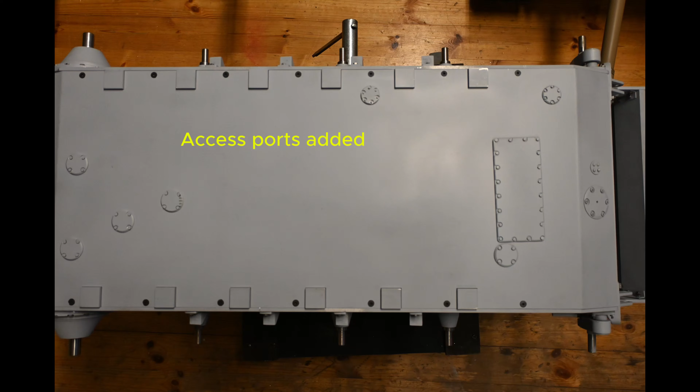In this video, I'll be looking at the underside of the hull, fitting some of the covers. These covers don't come with the kit, but they'll add a little bit of unseen detail. Next, I'll show you how I detailed the bracket connecting the upper to the lower hull, and then how I fit the components for the upper hull.

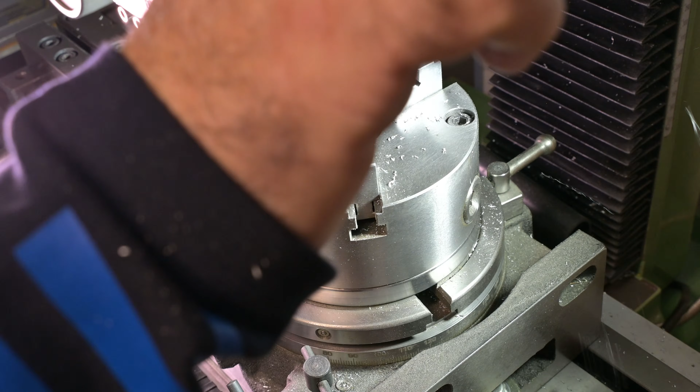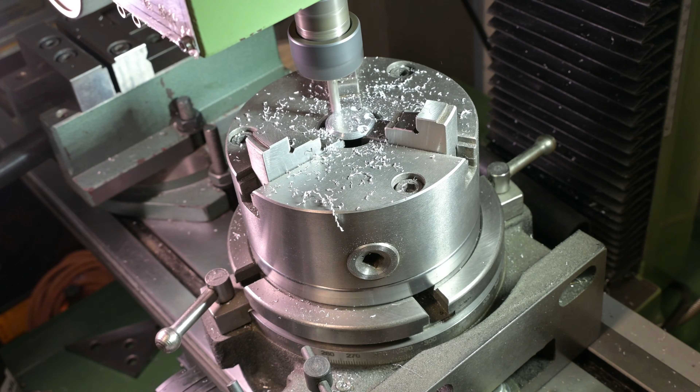I'm moving around in 120-degree increments. This is a bigger cover, and at this time it's 4 screw holes, so I'll be using 90-degree increments. It's also a slightly bigger tool.

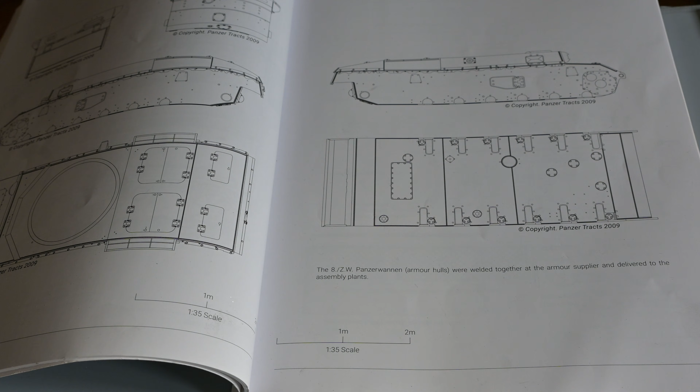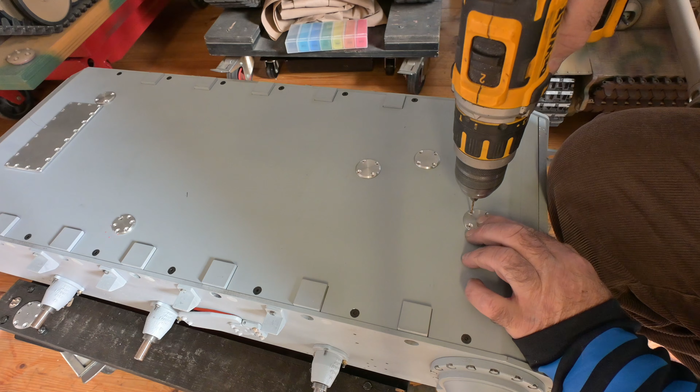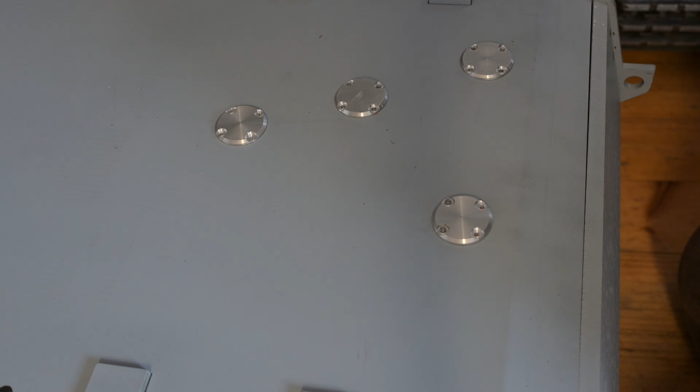Using the drawings in Panzer Tracts, I've worked out the locations for the various hatches. Here you can see I've placed them, and I've marked the locations for the drill spots. I'll drill out each of the hatch holes in a similar way.

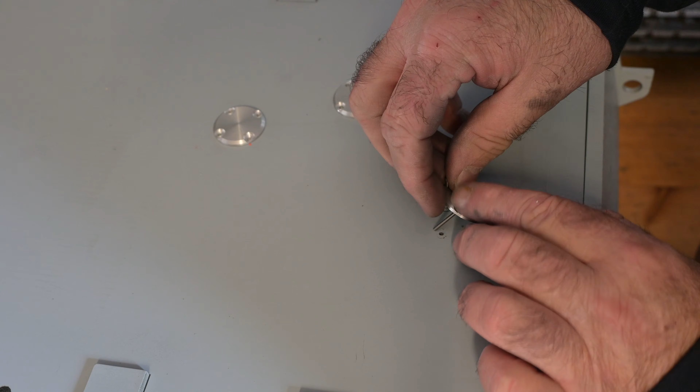Here we have the covers fitted. These are 10 BA screws and these are 9 BA screws fitting the hatches.

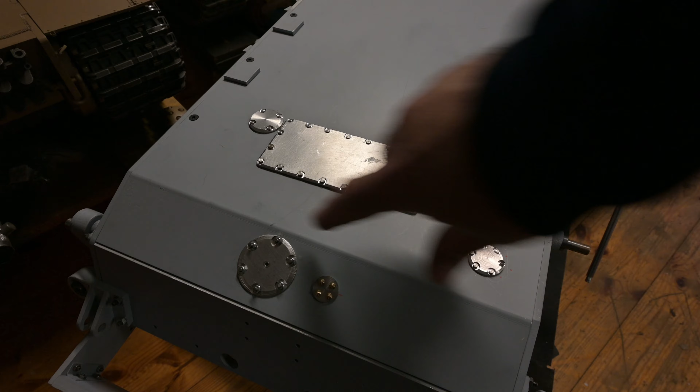I've also fitted these hatches to the rear. These will be more visible. The small access hatch that you can see here, I've added cone heads to this. They're dummy cone heads.

So now we have the access hatches etch primed. Once the tank is built, these probably won't be seen much. So why do I bother adding them? Well, I'm not a professional machinist, so it's good practice just to make these hatches. I may have to make something similar for a more visible place in the future, so it's good practice to make these hatches now. Also, it's nice to know that that detail is there.

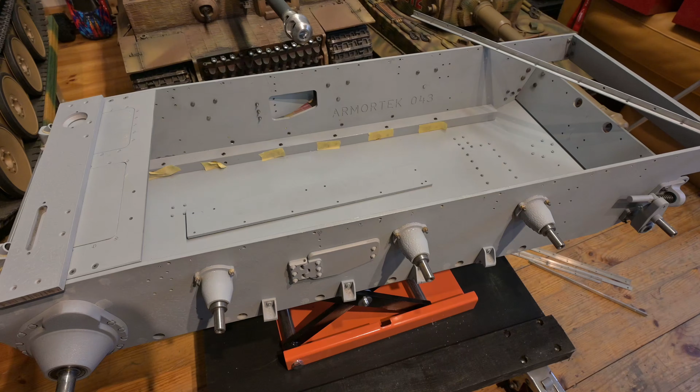Next would be to start the upper sides of the hull. The kit came with these aluminium angle brackets and they fit roughly in this position, and the upper hull was built on top of those.

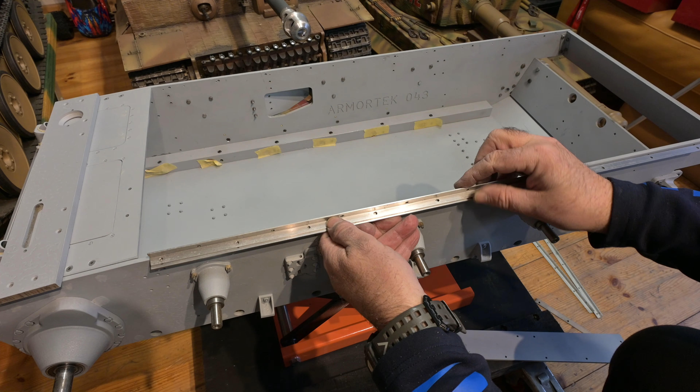And this is how the upper hull is attached to the lower hull. It's quite similar to the real Panzer III. The full top part of the hull could be removed for work on the transmission and engine by undoing the brackets and simply lifting away.

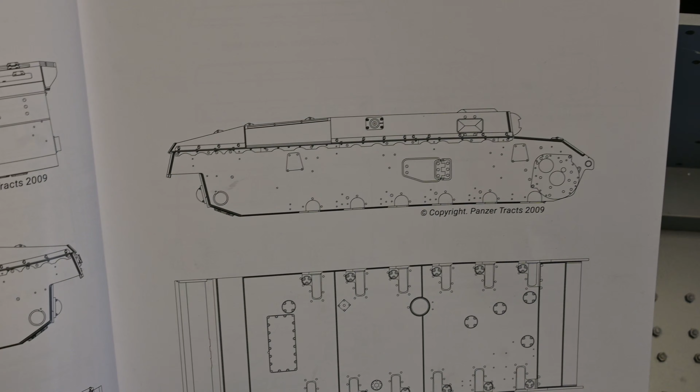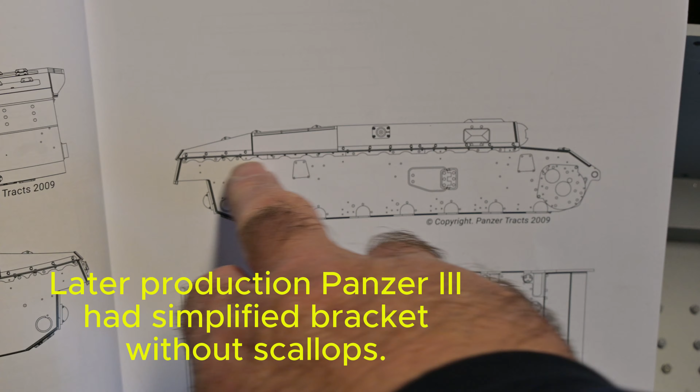Looking at my drawings in Panzer Tracts, the bracket should actually be a bit longer than the kit bracket. Also, some of these models also had this scalloped finish on the bracket attaching to the hull. The kit is just a plain angle bracket.

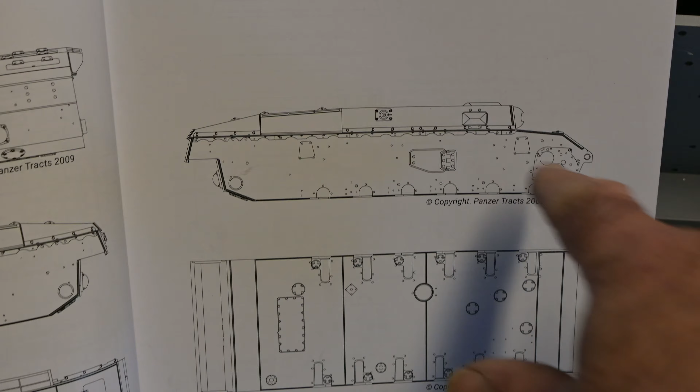So I'm going to use new brackets and I'm going to replicate the scalloped finish. Here's one of the new brackets I've made. They're a little bit longer than the kit part.

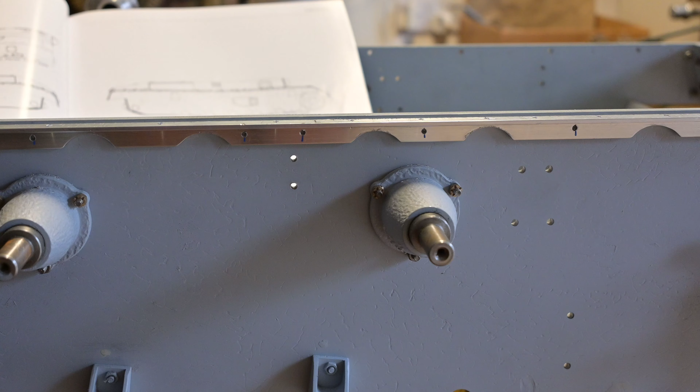Here's the new brackets I've made. They'll fit to the hull using M2 screws. I've tapped the new holes with M2.

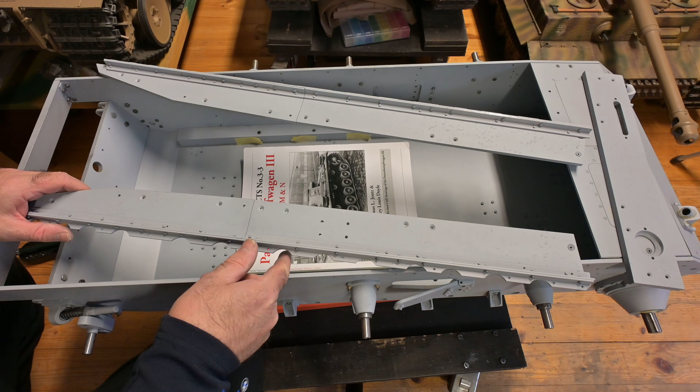Here we have the hull sides assembled with my new brackets. They'll fit on here. I can bolt them on using M2 screws. I've also fitted the brackets to attach the front glacis plate, as my bracket covers the screw position.

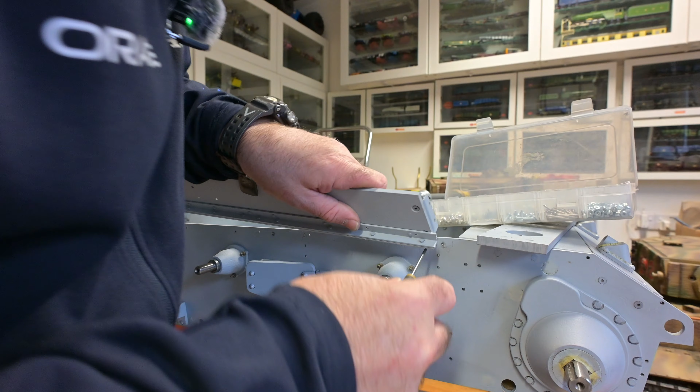So let's get these in place. I'm not going to secure every hole at the moment. I want to keep it fairly loose for the moment.

So that's that hull side secure. It's only held with 3 bolts at the moment, whereas I've actually tapped 13 screw holes to hold it on. That's both sides fitted securely, just 3 or 4 screws holding each side.

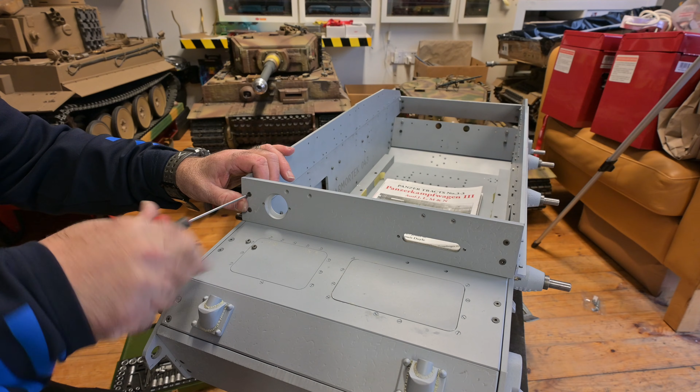Next we'll fit the front glacis plate to the brackets, with M3 countersunk screws.

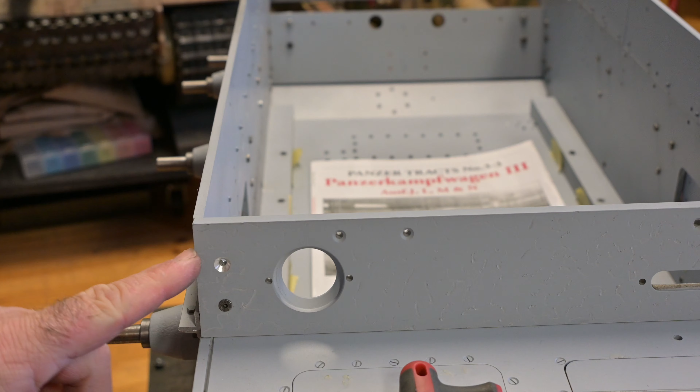I'm just enlarging the countersink here because the screws are actually protruding a little bit, so I'm making the countersink a bit deeper. This will be much easier to fill later, whereas I would have to file this screw down.

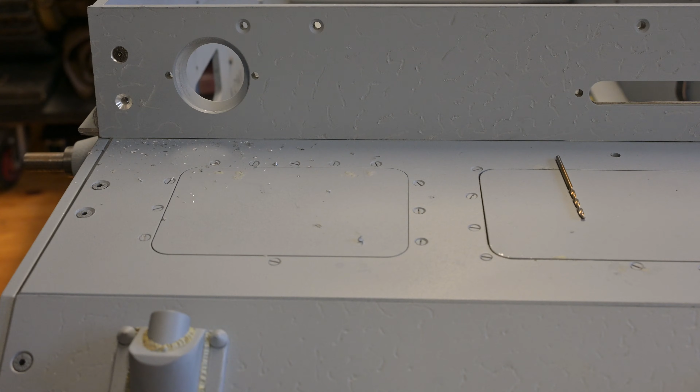So that's the glacis plate fitted securely.

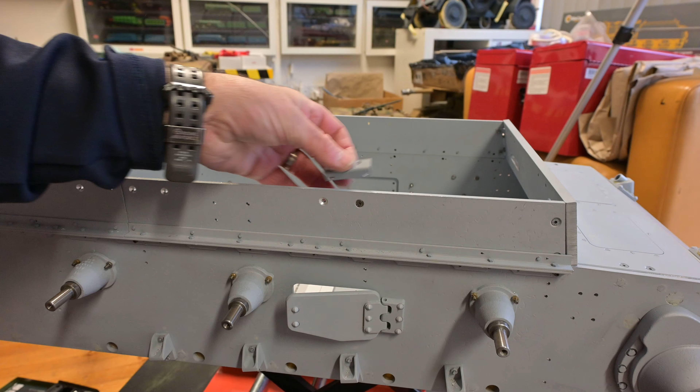The decks are held in place with these small brackets. They secure in each of these locations. Next I'm going to fit these brackets and secure the top decks.

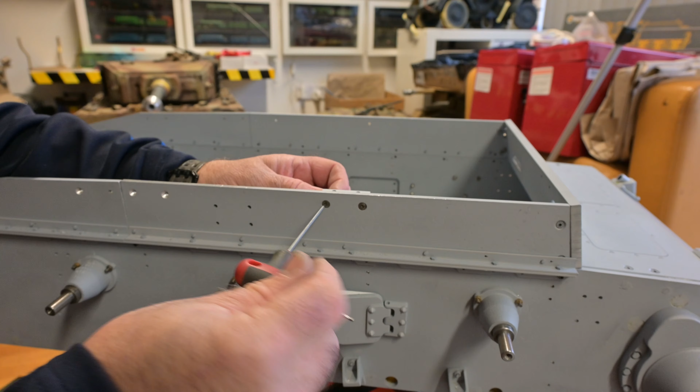Here we have the top deck fitted onto the brackets. So here we have the basic assembly of the upper hull. Top deck fitted, rear deck. The rear deck is just loosely fitted. I want to take it off again.

The rear hatches were held in place with this simple bracket. I want to make a complete inner bracket for each of the hatches. If you look at my last video, you can see I did something similar on the front.

This kit didn't have a floor onto which to mount the electronics. I usually make my own anyway, so that's something I'll do next. That's why I want to leave this rear end separate for the moment. So I'll put a floor the full length.

Also, I want to put a firewall in which will support the deck divide here a little bit better anyway. So right down inside, it'll divide up the interior space. I'll most likely fit the batteries into this section and the electronics into the rear.

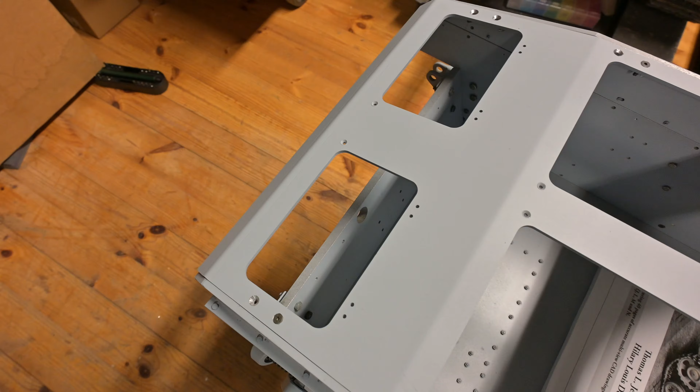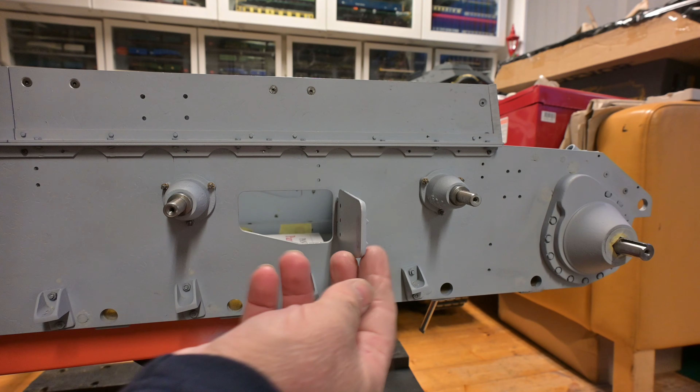There's quite good access here with the hatches. The base here is quite open. There's no part to fill this. On the original Panzer III there was a mesh grille here, so I'll see if I can get a suitable mesh to make up a grille. Also the escape hatches here, they're opening freely, so I want to put some sort of catch to keep that in a closed position.

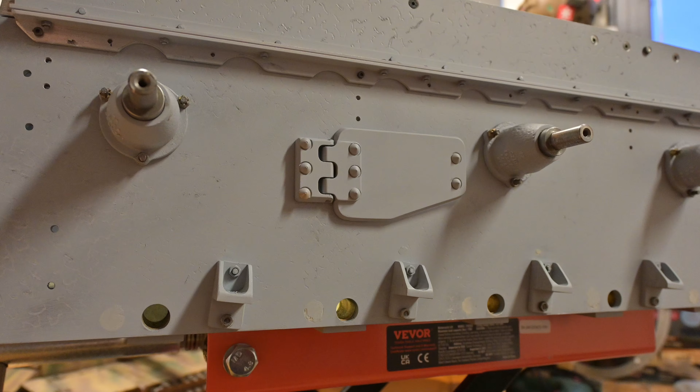Here we can see those hatches mounted. Here's a view of the fillet detail.

In the next video we'll have a look at filling some of the screw marks and also getting some fake milliput welds. We'll also have a look at getting a floor built into the bottom of the vehicle. This will enable me to fit the electronics and a firewall which will help to support the midsection of the deck. I'll also have a look at the possible layout of the electronics. Before fitting the electronics, I'll need to do a bench test.

This vehicle has motion and sound. If you follow the Armortek instructions, the suspension units would go in before the top deck sections. I'm planning on doing quite a few modifications to the suspension units. So for now I'm just trial fitting the top decks as well.